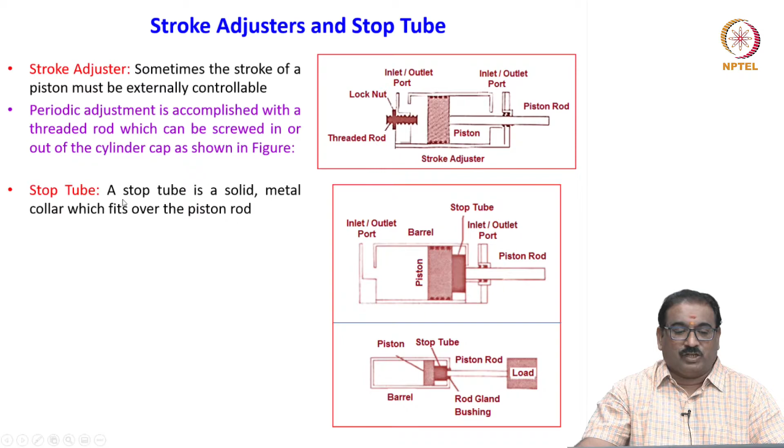Then the stop tube - again I have shown you the figure here. See, the end is the stop tube. Again inlet outlet, barrel, piston rod - all are common. Here the extra part is the stop tube. You will see at the end, rod gland bushings, when the piston rod comes out of the end caps. A stop tube is a solid metal collar which fits over the piston rod. A stop tube keeps the piston and the rod gland bushing separated when a long stroke cylinder is fully extended.

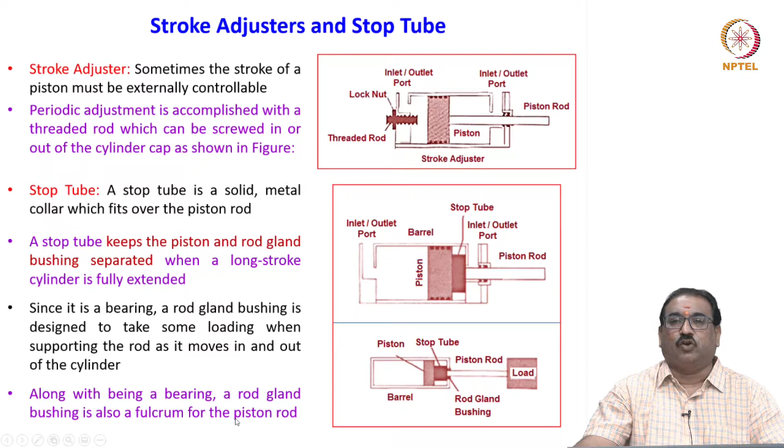Since it is a bearing, a rod gland bushing is designed to take some loading when supporting the rod as it moves in and out of the cylinder. Along with being a bearing, a rod gland bushing is also a fulcrum for the piston rod. If the load attached to the piston rod of a long stroke cylinder is not rigidly guided, then at full extension the rod will tend to teeter-totter or jackknife at the bushing, causing excessive loading. A stop tube protects the rod gland bushing by distributing any loading at full extension between both the piston and bushing.

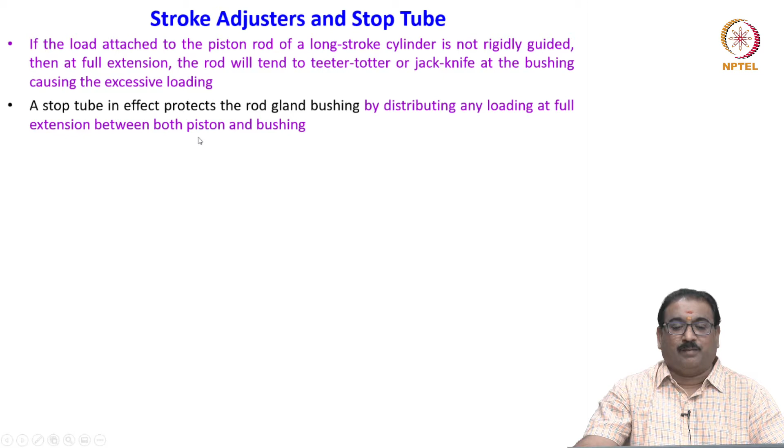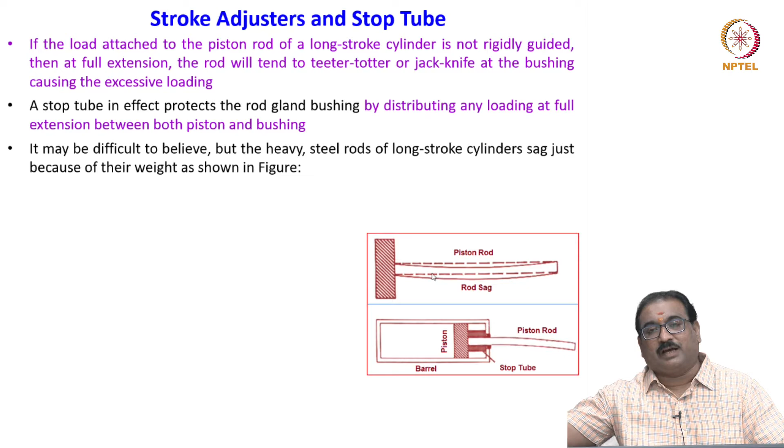It may be difficult to believe, but the heavy steel rods of long stroke cylinders sag just because of their own weight, as shown in the figure. Whenever the piston rods are bigger in diameter and the stroke length is very long, when they come out of the end, they will sag due to self weight. A 0.0071 meter diameter piston rod weighs a certain amount of Newtons per meter and will sag by a certain amount at the center of this span.

On long stroke, horizontally mounted cylinders, undesirable bearing loads are generated at the rod gland bushing because of the rod's sag when the rod is fully extended. You will see here how it sags. On this cylinder, a stop tube is used to separate the bushing and the piston when the rod is extended. This reduces the load on the rod gland bushing alone, because it is distributed over the stop tube.

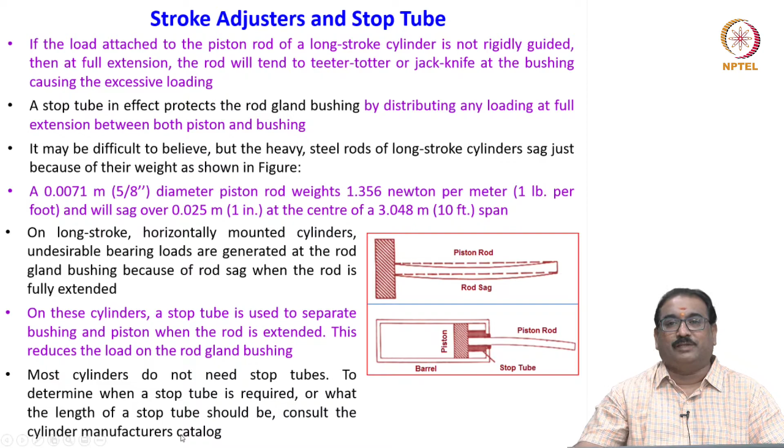Most cylinders do not need a stop tube. To determine when a stop tube is required, or what the length of the stop tube should be, consult the cylinder manufacturer's catalog. They will specify when you should go for stop tubes, based on the size and also the length of the cylinder rod and diameter.

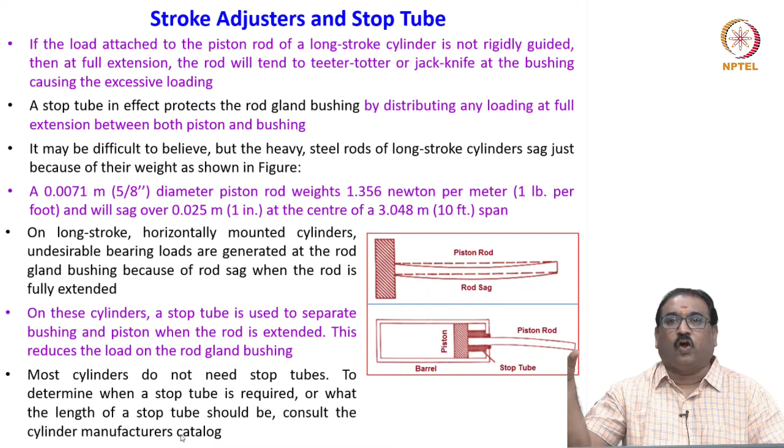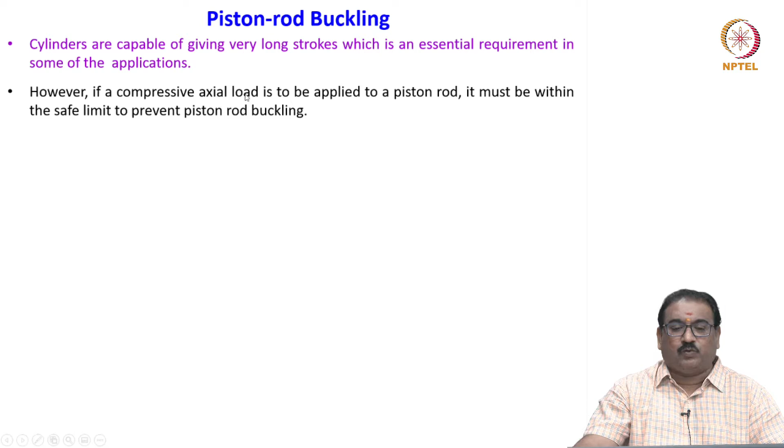As I have told you, cylinders are capable of giving very long strokes, which is an essential requirement in some applications. However, if a compressive axial load is to be applied to the piston rod, it must be within the safe limit to prevent the piston rod from buckling. Owing to buckling stress, the permissible load of the piston rod should not go beyond a certain maximum value, as given by the Euler's formula, which relates to the stroke and the piston rod diameter.

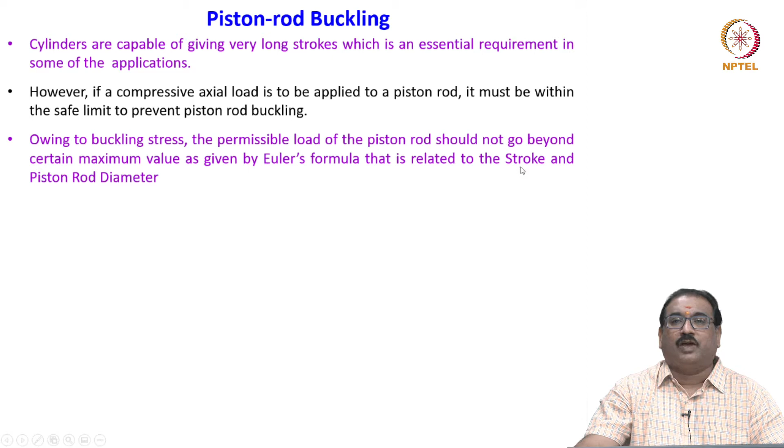The Euler's formula for elastic instability is expressed as: permissible buckling force Fk equals pi squared times E times J, divided by Lk squared into S. Here E is the elastic modulus, J is the moment of inertia, and S is the safety factor, generally chosen as 5. Lk is the equivalent length for buckling, which is 1 to 2 times the stroke length L.

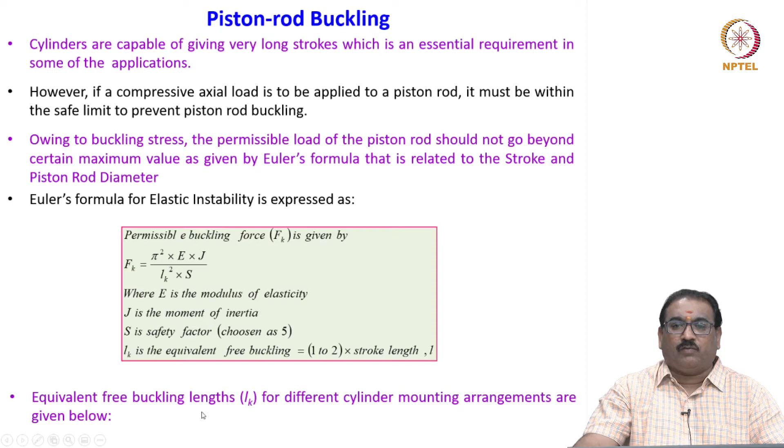Equivalent free buckling length Lk for different cylinder mountings are given below. You will see different cases for the mounting. Euler case 1: here the end of the rod is free laterally. For a slender column with one end free and the other end fixed, the free buckling length Lk equals 2 into L, where L is the stroke, the complete stroke.

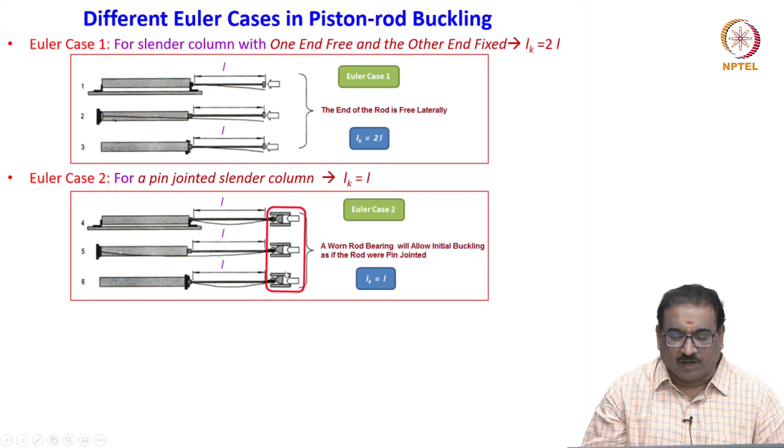Euler case 1, Lk equal to 2L. The Euler case 2, meaning for a pin jointed slender column, Lk equal to L, meaning here the worn rod bearings will allow the initial buckling as if the rod were pin jointed. In such cases, you will use Lk equal to L, meaning equal to stroke length.

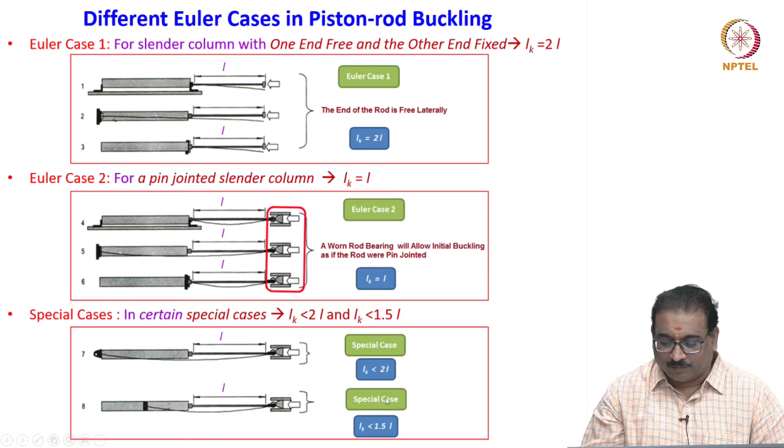Now the special cases. In certain special cases, the Lk is less than 2L, and Lk is less than 1.5 times L. These are the special cases. In both cases, the effective length Lk is taken as an empirical value when they are mounted like this.

Various types of cylinder mountings exist, among which flange, trunnion, side lug, side tapered, clevis, tie rod and bolt mounting are most common. I will show you some cylinder mountings here. These permit versatility in the anchoring of cylinders. The figure shows the various types of cylinder mountings.

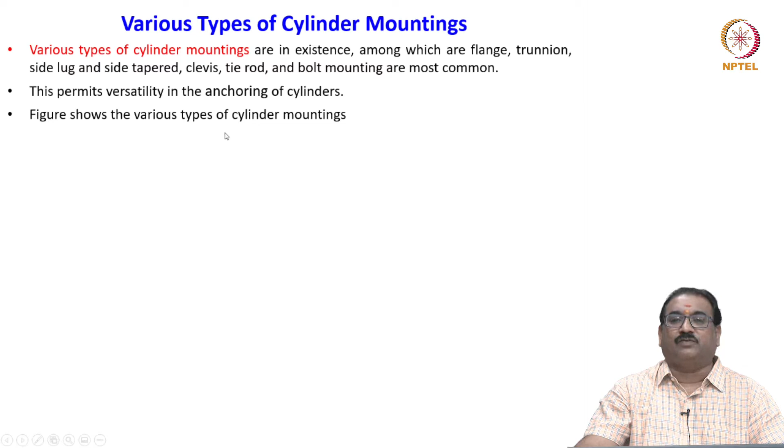The rod ends are usually threaded so that they can be attached directly to the loads, or a clevis, or a yoke, or some other mating device are used here. You will see the different types of cylinder mountings.

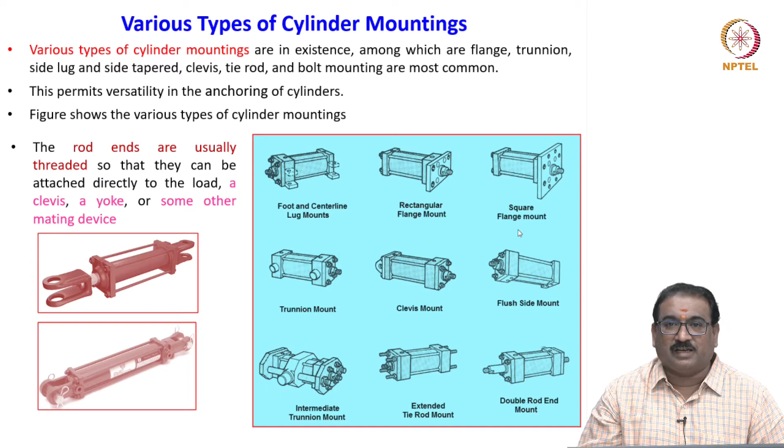There are various types of mountings. When installing the cylinder, be careful about the mounting based on pressure requirement, movement, and working cycles - all these are very, very important.

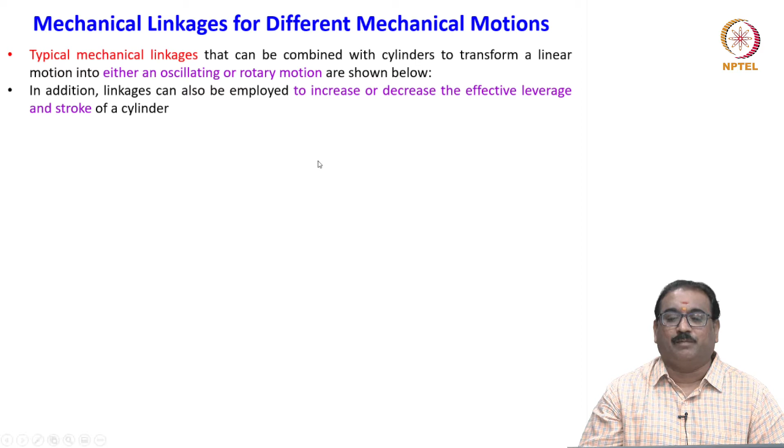Now we will discuss some mechanical linkages for different mechanical motions. Typical mechanical linkages can be combined with cylinders to transform linear motion into either oscillatory or rotary motion, as shown in the figure below. In addition, the linkages can also be employed to increase or decrease the effective leverage and stroke of the cylinder.

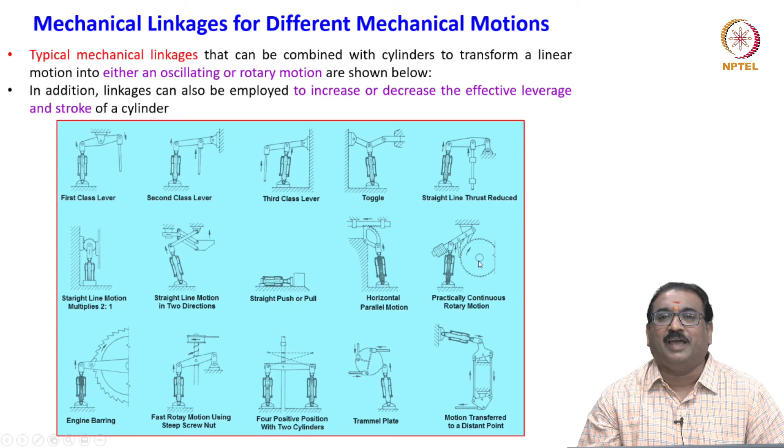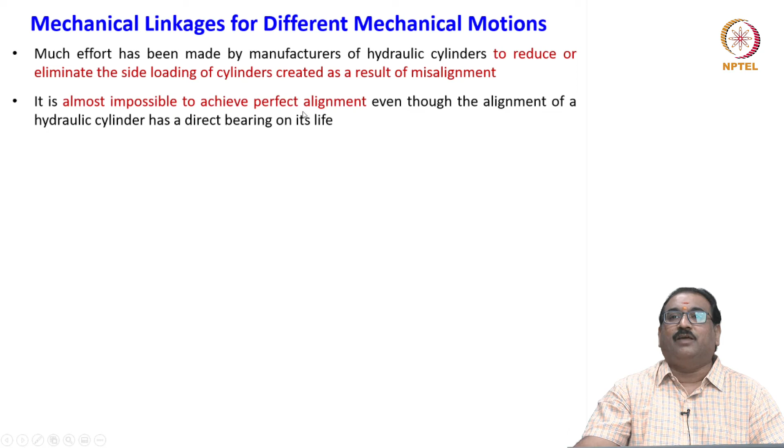Much effort has been made by manufacturers of hydraulic cylinders to reduce or eliminate side loading of the cylinder created as a result of misalignment. It is almost impossible to achieve perfect alignment, even though the alignment of a hydraulic cylinder has a direct bearing on its life.

A universal alignment mounting - here you will see the cylinder, two sides. This accessory is designed to reduce the misalignment problem, illustrated here on the two sides. By using one of these accessory components and a mating clevis at each end of the cylinder, the following benefits can be achieved: freer range of mounting positions, reduced cylinder binding and side loading, allowance for universal swivel, reduced bearing and tube wear, and elimination of piston blow-by caused by misalignment.

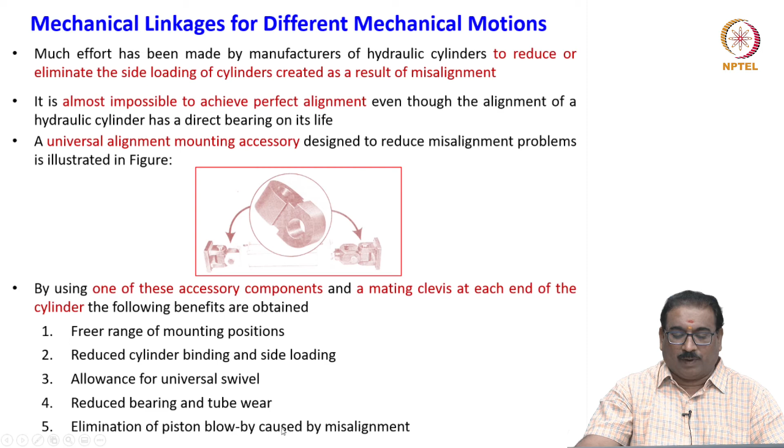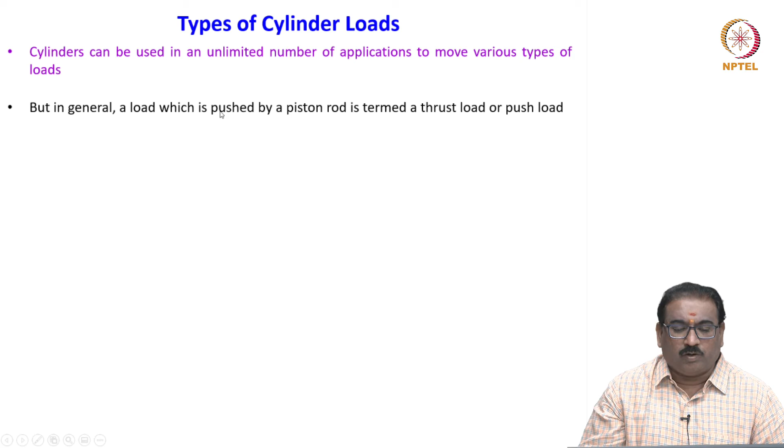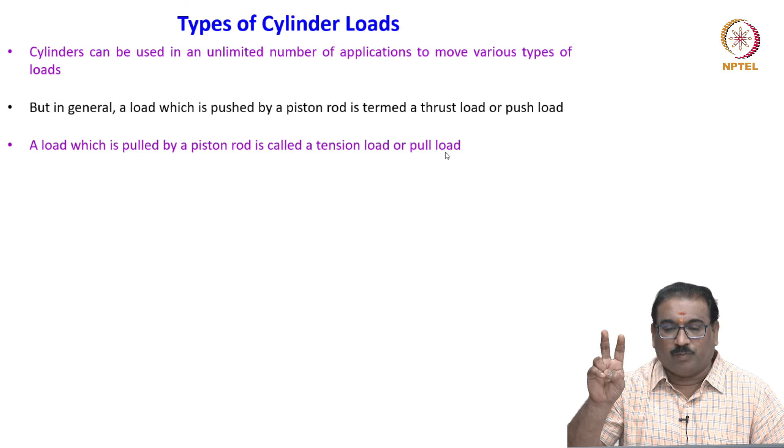Now, quickly we will see the different types of cylinder loads. Cylinders can be used in an unlimited number of applications to move various types of loads, but in general a load which is pushed by the piston rod is termed a thrust load or push load. A load which is pulled by a piston rod is called a tension load or pull load. So there are two types of cylinder loads: push type, also known as thrust load, and pull type, also known as tension load.

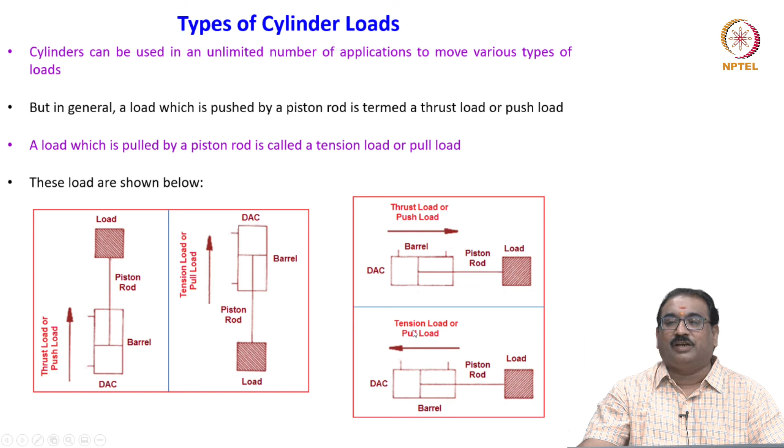Here I have shown you these loads. You will see a vertically mounted arrangement where fluid pressure is used to push, meaning the thrust load. Here you will see an arrangement where fluid pressure is used to pull, meaning the tension load or pull load. Here also, fluid pressure is used to push this - a push load, meaning the cylinder extends and pushes the load. The cylinder will retract here, where fluid pressure is used to pull it - the tension load. Please understand these things.